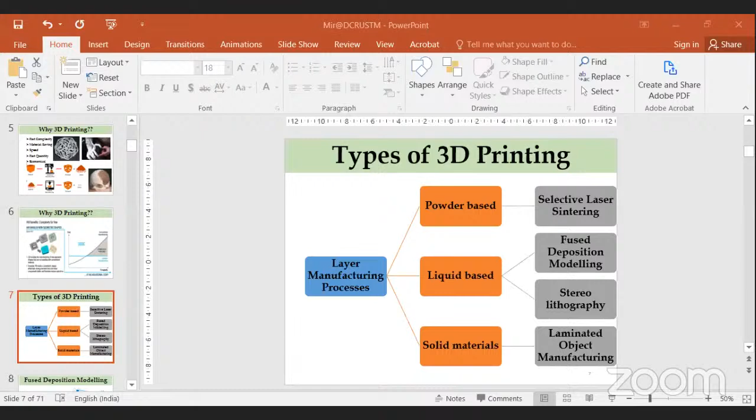Excuse me sir, sorry to interrupt. Sir, please share your screen, your slide is not visible. I thought initially you were giving a brief introduction, that's why I didn't say anything. Oh, you should have told me earlier. No issues, no issues, I'll just go through the slide. Now it is visible. Yes, visible sir. I'm sorry sir, this was the first slide, so I will just go through these slides quickly.

So I talked about this disclaimer from my side. This is the outline I was talking about.

Then I talked about what about basics. I was talking about why 3D printing.

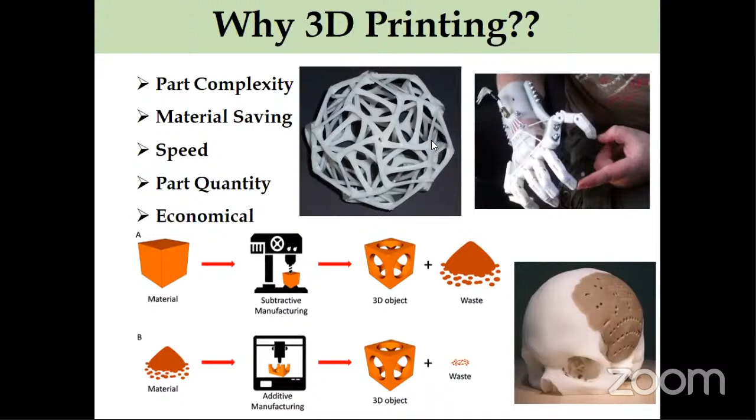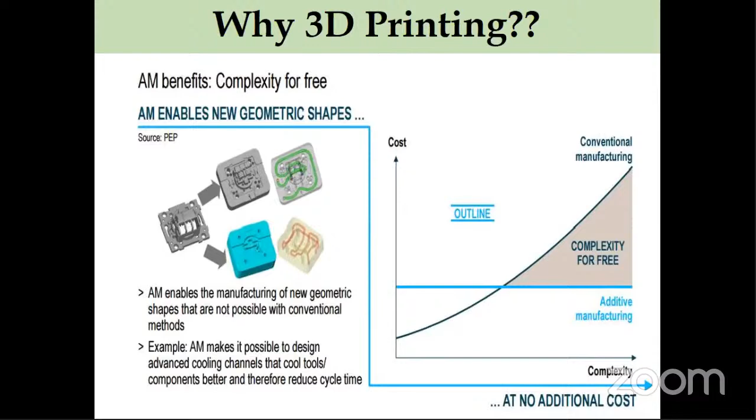Then I was talking about part complexity, that complexity is free. This graph shows how additive manufacturing enables us to manufacture complex products, and that too at a very low cost and with no additional cost.

So I was discussing about the types of this additive manufacturing processes, wherein we were discussing that there are mainly three types of base materials. One is powder, second is liquid, and third is solid.

In case of powder bed, we use a powder as the base material and the laser sinters it selectively. That is why we call it selective laser sintering.

Likewise, in liquid based, we have fused deposition modeling, which is not liquid based, but semi-liquid based, wherein the starting material is basically solid, but later on, because of the extrusion and heating of that polymeric material, it comes out in a semi-liquid state. Likewise, stereolithography and laminated object manufacturing, but my discussion would be more on fused deposition modeling.

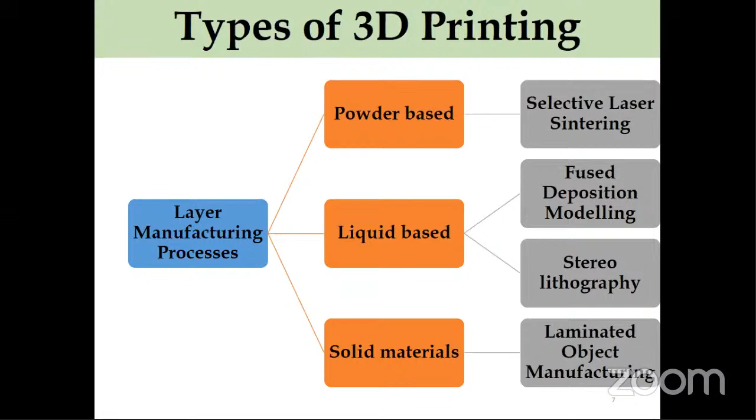This extruder is free to move in all directions, X, Y, and Z. And depending upon the information stored in the STL format of each layer, the extruder moves in different directions.

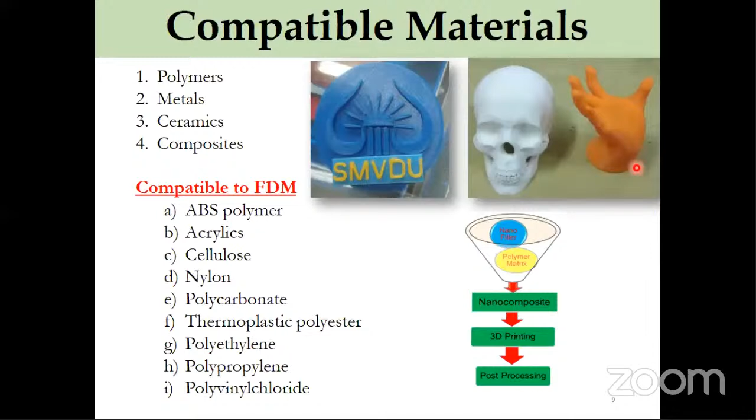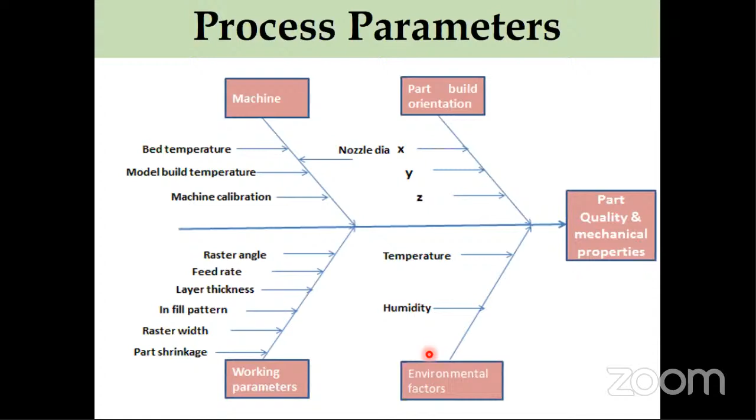Working parameters like raster angle, feed rate, infill pattern, and raster width will be discussed in the next slide. Environmental factors also matter - we have seen that when the fan or AC in the lab was on versus off, there is warpage which happens.

This is the effect of layer thickness. If you increase the layer thickness, the printed part will be rough. But if you want it smoother and want to capture the geometry very perfectly, you have to decrease the layer thickness.

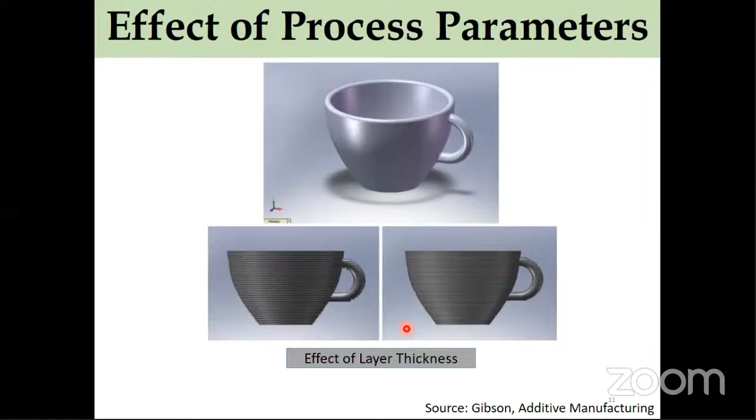So a small variation in layer thickness will actually vary the part quality. We were talking earlier about different infill patterns - how your material will be deposited.

This actually helps in weight saving also - honeycomb structure, triangular, rectilinear patterns. We have tried some of these in our work. And infill density, for example 100% infill density, or 70% infill density.

Part orientation - how you build the part - and layer thickness, what would be the thickness of each layer while you print it. Other parameters like raster angle, when it prints, what angle it makes, and the number of contours it keeps in each layer at the periphery. All these parameters actually determine the mechanical strength of these 3D printed parts.

There are some challenges also. For example, in a typical FDM process, there is a cold layer on which a hot layer is deposited, and because of this differential temperature gradient, stress gets developed which leads to contraction and may cause warpage. That is why we have to choose an optimal bed temperature and optimal extruder temperature, so that the temperature gradient is not too much, and the bonding is perfect.

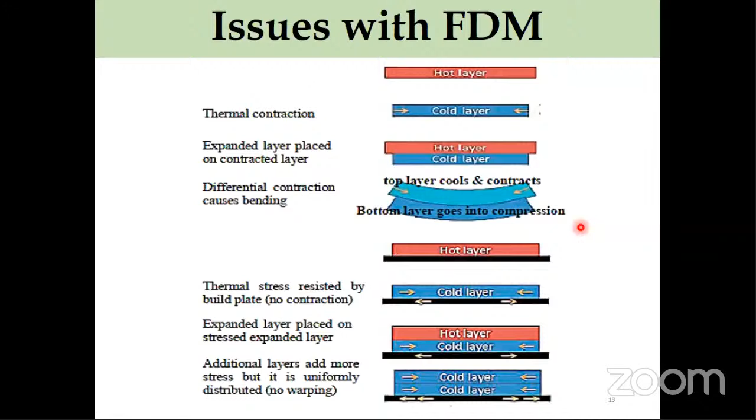The interbonding strength will actually determine the quality of your part, be it mechanical strength or any other property. If we take 3D printing as a whole, there are some challenges which need further research and improvement.

For example, we have limited choice of materials, particularly in case of metallic 3D printing, and the cost of materials is not that low. Dimensional accuracy, because of warpage and other issues, is not giving us accurate dimensional parts. Mechanical properties are also not that good, depending upon the process and parameters.

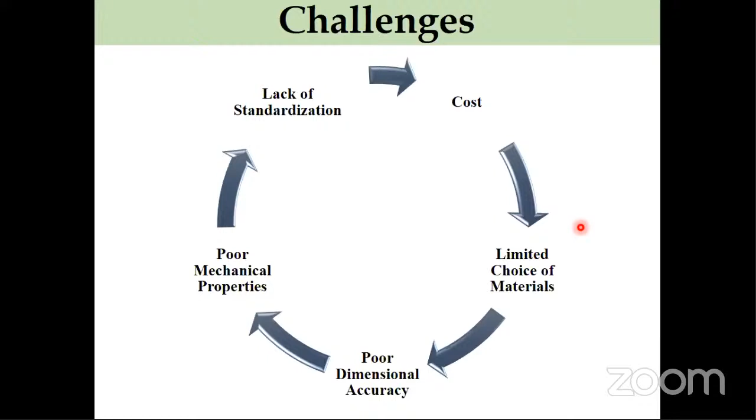There is also a lack of standardization because not much work has been done yet. You cannot say that for a given material, if you want a part good in tensile strength, what should be the printing parameters. There are lots of papers published, but there are still no standards available so that we can replicate results and get good outcomes.

If you talk about cost, the fixed cost in case of conventional or traditional manufacturing is high in all cases, whereas in 3D printing it is low - be it supply chain cost, tooling cost, or setup cost. As of today, you can purchase an FDM printer for as low as 17,000, so you can have a printer at your home or lab and start printing small samples or products.

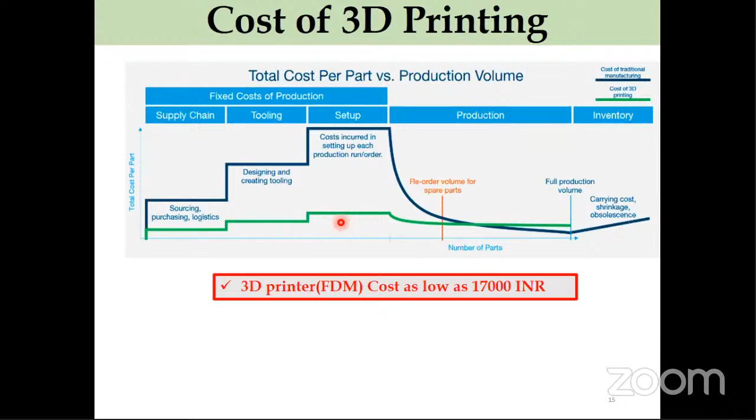We all know sustainability is the buzzword, and yes, 3D printing is sustainable because less waste is produced. We don't require any specialized tools or fixtures for additive manufacturing, and it has the ability to develop lightweight parts, which help in fuel saving and reducing the carbon footprint, leading to sustainability.

Largely, additive manufacturing or 3D printed processes are material efficient when compared with traditional machining and casting. It has the ability to produce optimized geometries, which develop products with good strength-to-weight ratio, resulting in lighter and more efficient engineering products. It also has the ability to create on-demand spare parts, reducing or eliminating inventory.

So we no longer require an inventory. If we have the geometry or the CAD file of a spare part, we can develop it, provided the intellectual property is not protected.

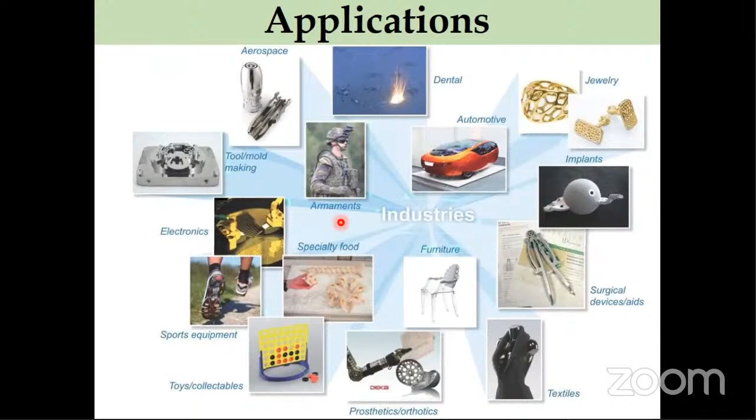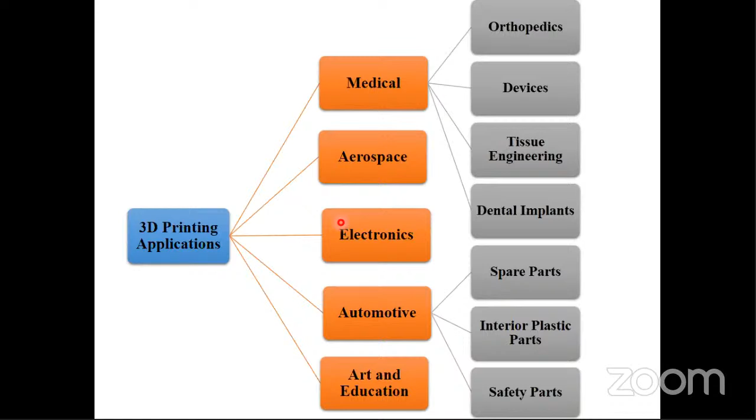So these are the different application areas where 3D printing finds applications: medical, aerospace, electronics. Then we have spare parts in case of automotive. So in automotive, a lot of applications are there, and medical, I would say, and that too post-COVID. If you see the market size of 3D printing, if you remember, we used to call it rapid prototyping. It is no longer known by that name, because now functional parts are being developed by 3D printing. And the market size of functional part manufacturing is growing, and it is anticipated by 2024 it would be around 33%.

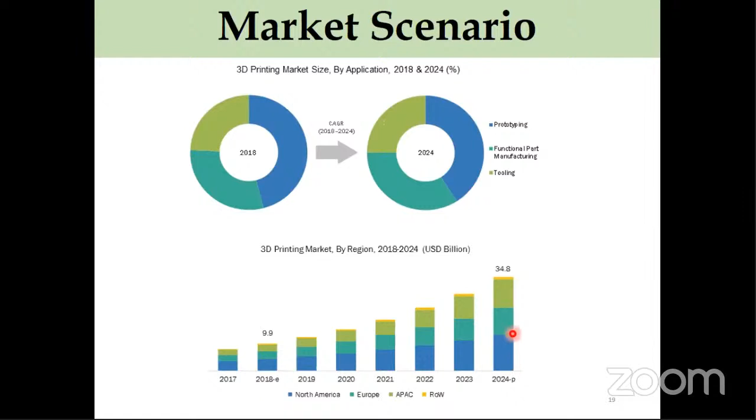And if you see country wise and the rest of the world, in USA and other countries, how the market share is increasing. So that is the future. And the future is basically your old toothbrush. You find in the night that your toothbrush is getting old, you will give a command to the printer, and tomorrow morning you will have a customized toothbrush, and you will use it in the morning. So that is the future.

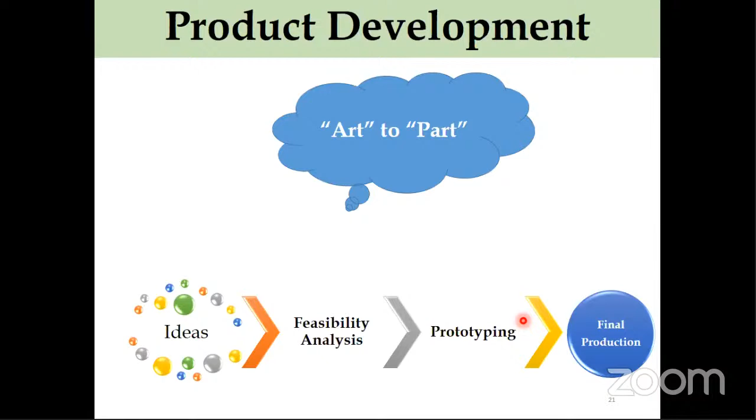And I have put some slides related to product design, because the title of the FDP was 3D printing and product design. So if we talk about product design, or the design process, it is a process from art to part. We have ideas, and then from those ideas, we do some feasibility analysis. Then after that, we have prototyping and the final production. How 3D printing will play a part in this, I will try to discuss.

So we all know that the design environment has changed. The old design process was very slow, and the product development cycles were not that short. Today, the life cycle of a product is very short, and design time for each product is getting shortened. So 3D printing will actually play a part, because apart from prototyping, it develops parts directly. It does not require any tooling, any separate fixtures or dies like we have in case of casting. So we don't require any molds or any other secondary manufacturing infrastructure. All we require is the CAD files.

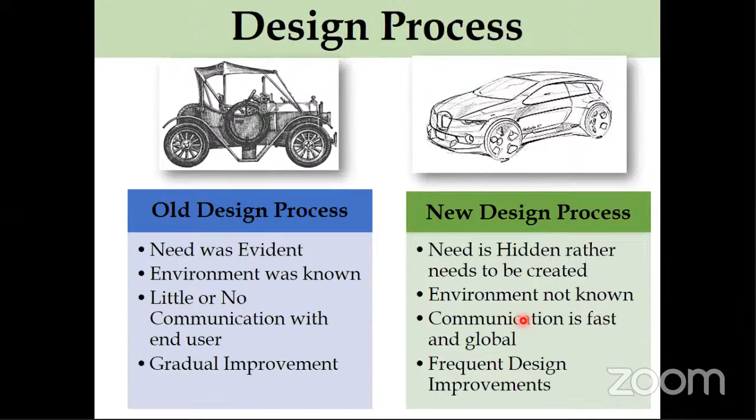So if we compare the old design process and the new design process, things have completely changed. We need frequent design improvements, and the communication is very fast with the end users. We need to change, and we need to keep the customers satisfied. Otherwise, we are out of the market. So that is where 3D printing will come to the rescue of the industries, or the engineering fraternity.

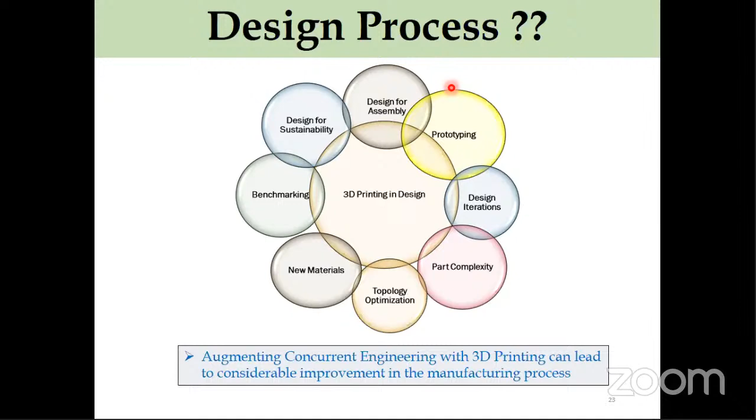If you see 3D printing in design, from prototyping to design iterations, including part complexity in a product, topology optimization, introducing new materials, benchmarking, design for sustainability, design for assembly, these pillars or facets, some of them are related to life cycle engineering. Some of them are steps in a product development cycle. They all will help improve the manufacturing process. So we have to augment concurrent engineering with 3D printing, and that will improve the manufacturing environment.

One more important aspect of any design is that somewhere a natural system is conceived by some person, and then we try to mimic that. And we cannot fully, because we all believe that nature is perfect. We cannot reach that perfection, but we try as engineers or designers to somehow reach it. But these natural systems are complex. So mimicking those systems and developing them by conventional processes was difficult.

But 3D printing, because we know the complexity is for free, and a lot of research is going on, and we have also started some work in this direction, wherein we take lessons from a natural system and try to incorporate them in our design, and then see that the product performance is improved.

There are some works done by designing armor for defense application by mimicking fish scales, and the armor was developed by 3D printing. Plant tissue inspired furniture, wherein a typical lattice structure was developed, and then insect wing inspired lattice for shoe soles. And by virtue of 3D printing, we could develop 3D printing gun, which would actually,

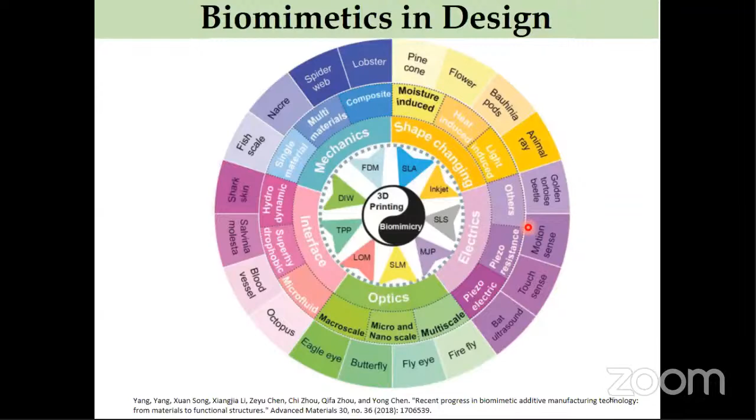So that is the beauty of this 3D printing, that things which were impossible to imbibe in your design, now it is possible. So looking at nature is now, I would say, easier, and developing products which are closer to nature would be easier. So what designers basically need is that any idea or any business is innovation driven. We want that the product development cycle should be short.

It needs capital, and when we talk about entrepreneurship, there is always huge risk, and we are dependent upon manpower. But in case you use this 3D printing, I think everything will be reduced, be it shortening of this product development time, decreasing your capital cost. Risk is also less, and the manpower requirement will also be lessened by using this.

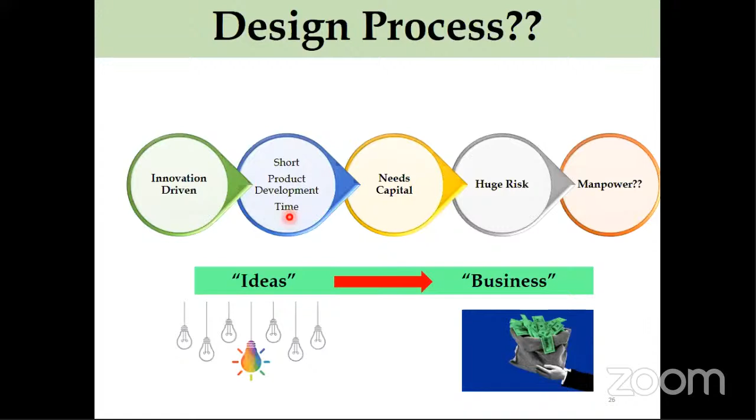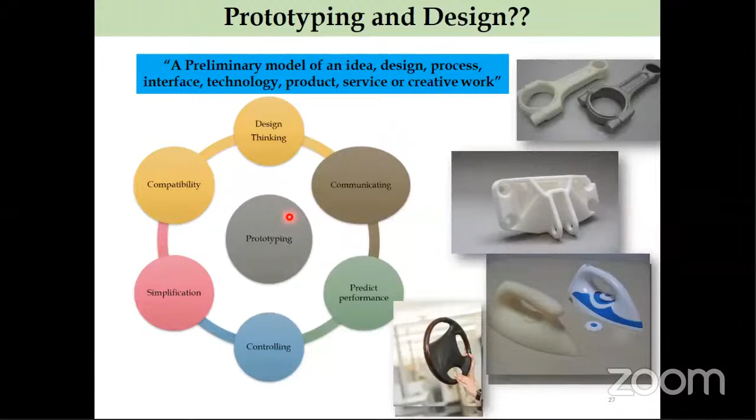So again, prototyping, I will skip this slide, how prototyping helps in improving the design process, because it helps in design thinking, communicating, predicting the performance, checking the compatibility, simplification of design, and controlling various parameters beforehand, before actually manufacturing the product by any conventional process. 3D printing can help.

So these are the things which we as designers or industrialists want. We want less material to be included. We want less initial investment, less labor cost, easy. So these all things will be done by 3D printing.

Now, another aspect is benchmarking. Whenever we are into product development, we actually first study other designs. So designing is not like we will sit in a room and start thinking, and we may end up reinventing the wheel. That should not happen. Before we start any product development, we study previous art, we study competitors' products, we study the patents, literature. So that all has to be studied.

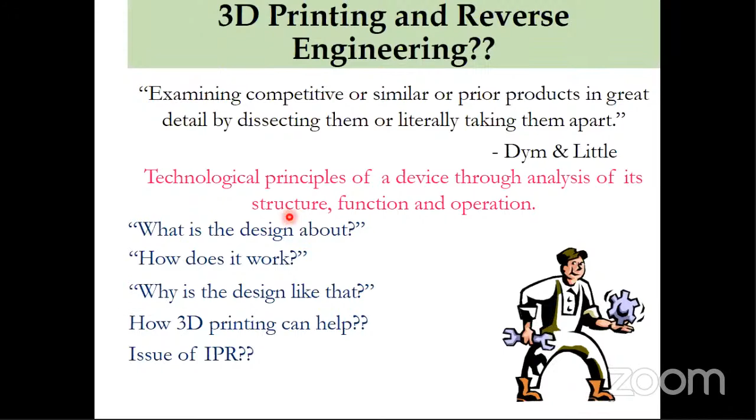But sometimes we don't have the designs. We have the product, but we want to analyze the products of a competitor or any existing product. For that, we need reverse engineering, and 3D printing can help in developing parts fast by benchmarking other products, or by doing reverse engineering of products, wherein, for example, the designs are not available, or they are protected by intellectual property rights, and we want to just study it. So there 3D printing will also play a part in the design process.

So since part of my talk will be related to tribology, for those who have not worked in the area of tribology, it was actually coined by Peter Jost in the year 1966 in the famous Jost report, in which he concluded that if we use good tribological practices, the GDP of any nation can be improved by 1%.

So it is the science concerning friction, wear, and lubrication, and we know that 1/3 of the world's energy resources in present use appear as friction in one form or the other. So that is where we as tribologists, or mechanical engineers, come into the picture, that we want to reduce the friction. For example, in an automobile car, if the friction is reduced, there will be saving of fuel, and that will improve the lives of the people, number one, economically. Secondly, that will help from an environmental point of view also.

So what is tribology? Two surfaces coming into contact, and they are sliding on each other. There's a friction force which gets developed, and because of this, there is a lot of complexity which comes into play. There is chemistry, there is third body abrasion, various types of wear, how this wear happens, what is the speed at which they are sliding, what is the load, what is the temperature, what is the direction of sliding.

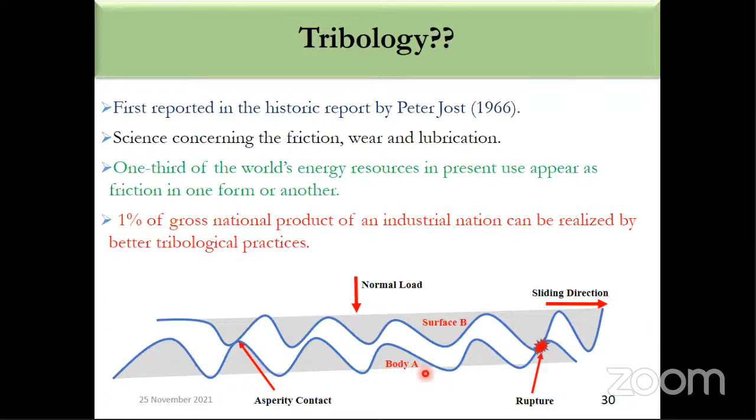These all things actually determine what is the coefficient of friction and how things wear out. So that would be discussed in one or two projects which we have done. So when we talk about wear and friction, it is not always that we want to minimize friction and minimize wear. No, it is sometimes the other way around also, depending upon the application.

Suppose we are working for developing brakes, we are developing clutches, we are working on tires, on developing shoes. So we want that the material should wear out very less. That means it should have good wear resistance, or the wear should be minimum and friction should be maximum. So that is this application.

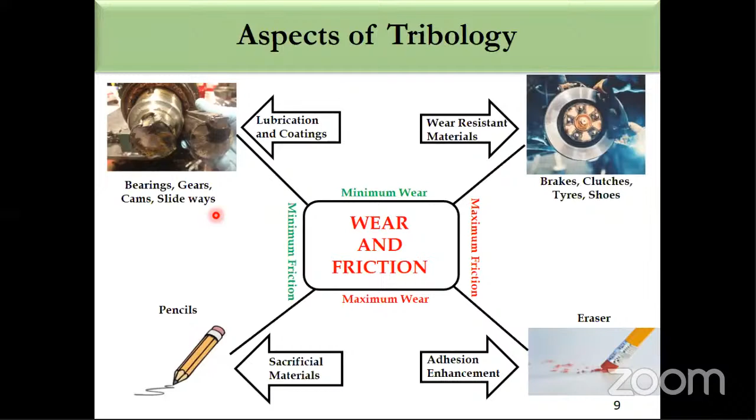And sometimes we want that it should have maximum wear, maximum friction, say, for example, in case of an eraser. And sometimes we want minimum friction, maximum wear, say, for example, in case of a pencil. And sometimes we want both to be minimum, say, for example, in case of bearings, gears, cams, sliding ways. So that means the area of tribology is very vast, and we have very different challenges depending upon the application.

Now, I'll start with the work, what we have done previously. This was the brief background because I anticipate that the participants would be from different fields of research and different backgrounds. So that's why I thought that I will give a brief introduction so that you can connect with what I want to share.

So the first project was basically on mechanical behavior of 3D printed parts, wherein we developed samples of polylactic acid according to ASTM standards, and we varied the various 3D printing parameters such as primary layer thickness, bed temperature, infill pattern, and then we did tensile testing as well as flexural testing for these PLA samples.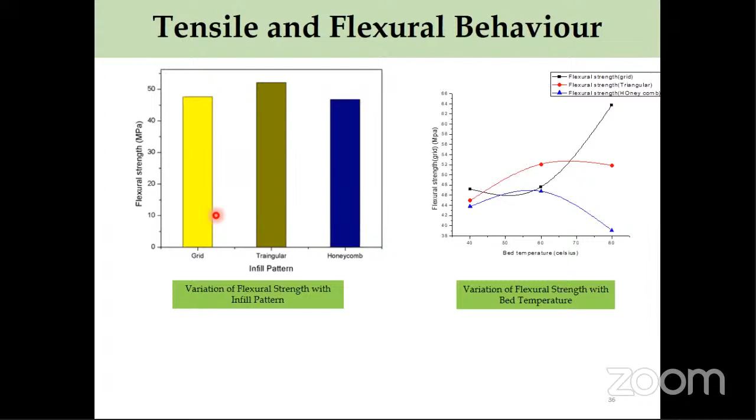We did some SEM analysis in which we could observe that there are differences in the modes of fracture which are happening, and primarily the interbonding strength is the key parameter which actually determines the strength of the part. And sometimes it was a brittle fracture, sometimes it was a ductile fracture, some amount of necking was observed prior to the actual breaking of the samples.

So the key point which we found from this SEM analysis was that if the interbonding strength is improved somehow, the parts will actually improve the strength, because the cracks and other things actually get initiated at the interbonding layer. So if that bonding is strong, the crack initiation may be delayed.

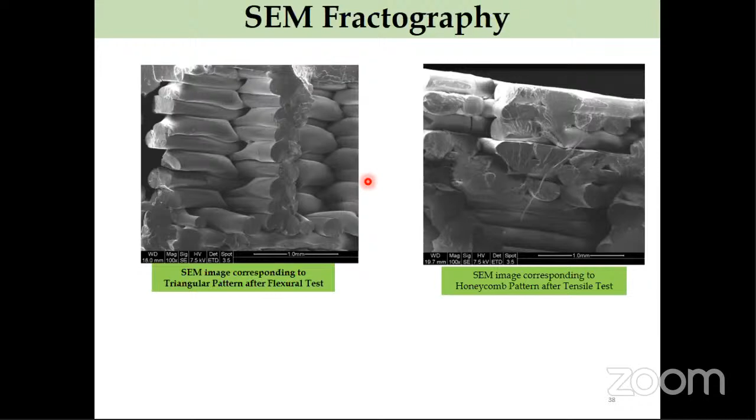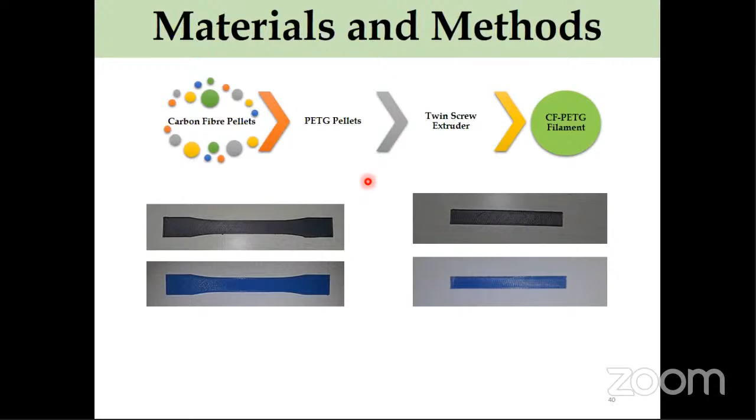Another small work which we did was related to 3D printed composites. It was related to PETG, wherein we introduced carbon fiber pellets inside these PETG samples, and then we tested it for tensile strength as well as flexural strength, and then in a separate work we have actually done the tribological testing of these samples also.

And these results are for carbon fiber reinforced PETG, and we could see that the addition of carbon fiber as reinforcement, 20% by weight to the PETG, improved the tensile strength. So that was one result. And another important observation which we found, that at the layer thickness 0.1 and at all infill percentages, this behavior was observed, but not at higher layer thicknesses because of poor matrix and filler addition. And we could see a very good improvement in the tensile strength, which is around 114% for

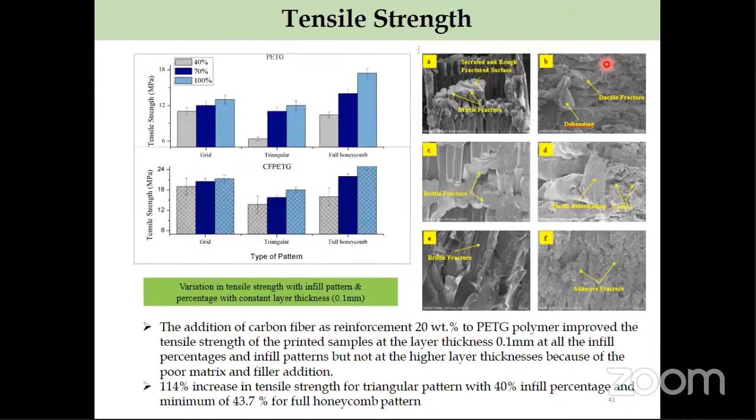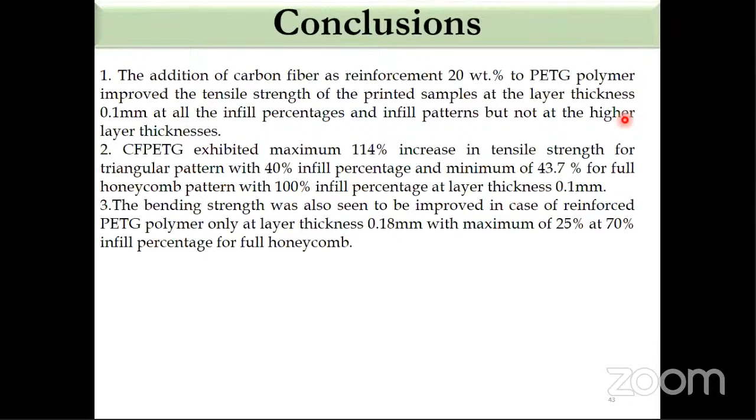And we could see that the bending strength was improved in case of reinforced PETG only at a layer thickness of 0.18 mm, with a maximum of 25% at 70% infill percentage for full honeycomb. So that was about flexural strength, which improved. And these were some of the major conclusions of this work, that the carbon fiber actually improved the tensile strength at the layer thickness of 0.1, and also it improved the bending strength by reinforcing it with carbon.

Another work was related to tribology of FDM printed parts, wherein we did some surface texturing. Surface texturing has a very great potential in improving the tribological performance, because texturing introduces local depressions, and they trap the wear debris. Because if the wear debris comes between two sliding surfaces, third body abrasion happens and it causes abrasive wear, and that causes ploughing, which is very detrimental for the material. And they also act as reservoirs for lubricants.

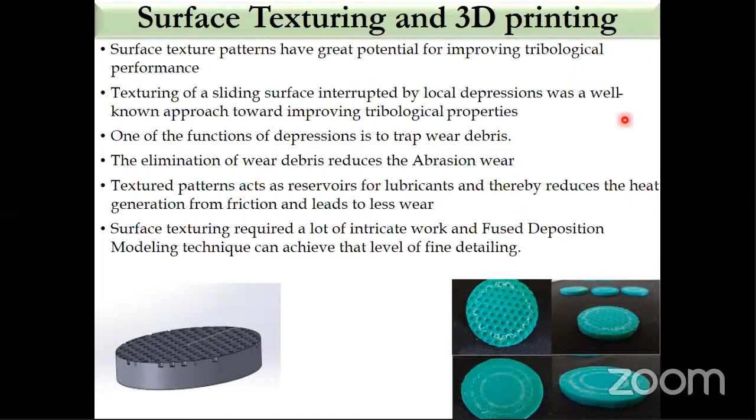So if we are doing a wet lubricated condition, then in these textures the lubricant gets stored, and that actually reduces the heat generation from friction and leads to less wear. Surface texturing requires a lot of intricate work, and it is a little bit difficult by conventional processes, but the fused deposition modeling technique can do it very finely, and we did it in our lab.

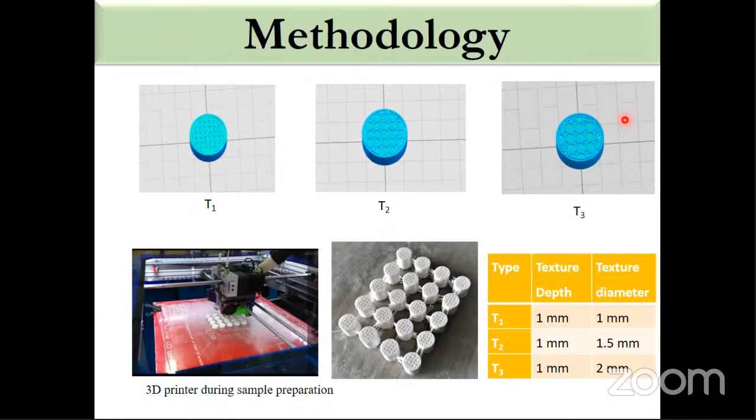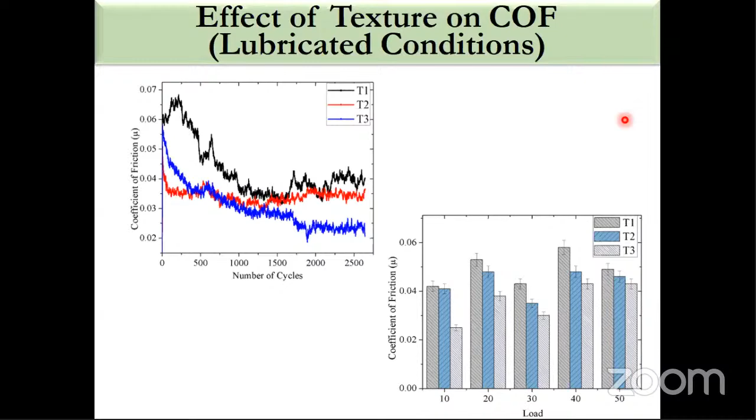And likewise, for lubricated condition, we could see that texture T3 is performing better, and we could see from the frictional characteristic also that with the increase in the number of cycles, with time, the curves are getting smoother, and not much deviation or erratic behavior was observed, which is actually good, because these textures or depressions basically store 2 things. One is the lubricant, another is the worn out material, which helps in improving the tribological performance and delays the wear process, which is a good thing.

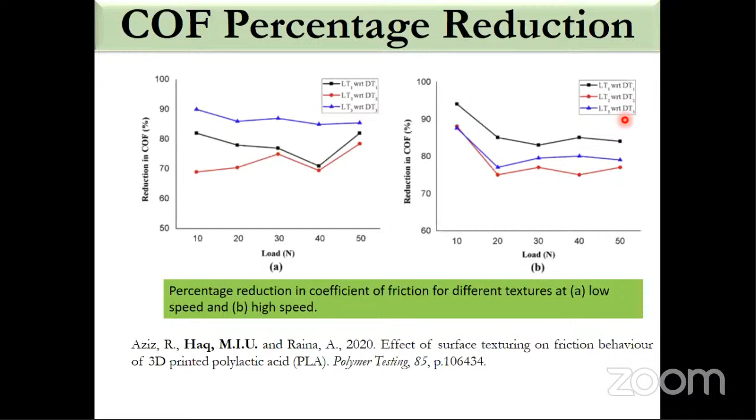Another observation was the percentage reduction in coefficient of friction for different textures. At low speeds and at high speeds, we could see a good amount of percentage reduction, around 70%, which is a good thing. So this work is already published. You can read it. We did some SEM analysis of these worn textures at a particular load, and we could see that very peculiar, smoother worn surface features were observed.

In comparison to non-textured samples, we could actually improve the wear behavior, and very different and very peculiar worn surface features were observed because of the entrapment of the wear debris, and because of the storage of the lubricant in these small textured holes, or you can say these depressions.

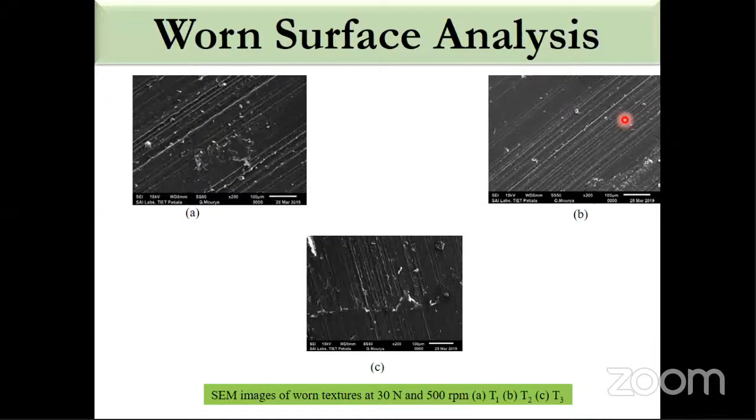So these were some of the conclusions from this study. The coefficient of friction is minimum for T2 under dry conditions, while for lubricated conditions, T3 was the better one. But it was observed that this is because of the synergetic effect of two factors: the real area of contact and the lubricant retention capability of the textures. So that was the key observation.

And as I told you, plowing of the material in bulk was absent, which is because of effective layer formation and entrapment of the wear debris in the depressions of these textures. So you could see that reduction of coefficient of friction was observed for texture T3 at lower speeds, while T1 at higher speeds gave the maximum reduction in coefficient of friction. So these were some of the conclusions which we could draw from this study.

Another work which we did was stage 2 of the PETG work, which we first tested for mechanical strength. Then we did tribological tests on these PETG and carbon fiber reinforced PETG samples. We tested the samples at five different loads, 10, 20, and so on up to 50, at both high speed and low speed. The wear track diameter and the sliding distance were kept around 100 and 1500. And to check the morphology of these worn surfaces, we did SEM analysis.

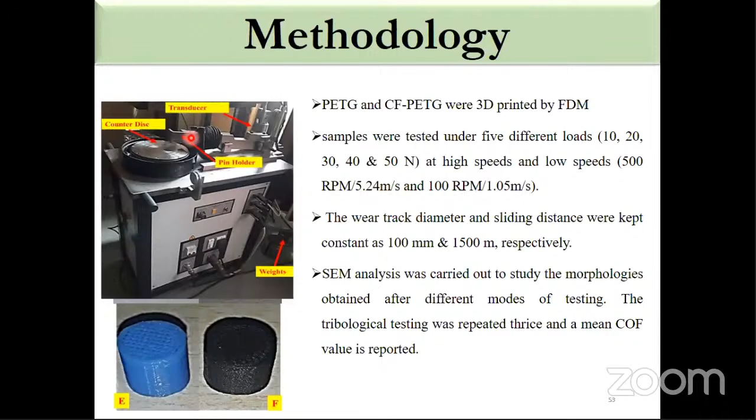This counterface rotates, and rotation of this counterface disc helps in the sliding action of these two materials. So this is a unidirectional pin on disc tribometer. It is not a reciprocating one. It is a unidirectional sliding wear tester, which we used in this study.

As some of you must know, carbon fiber, like graphite, is a very good solid lubricant. Carbon, because of its layered structure, with consecutive layers bonded by weak van der Waals forces, acts as a solid lubricant. And that was visible here: when we tested these samples at different loads, in comparison to non-reinforced PETG, the coefficient of friction is lowered. And at a higher RPM also, a similar behavior was observed, that the carbon fiber has a good role in reducing the coefficient of friction.

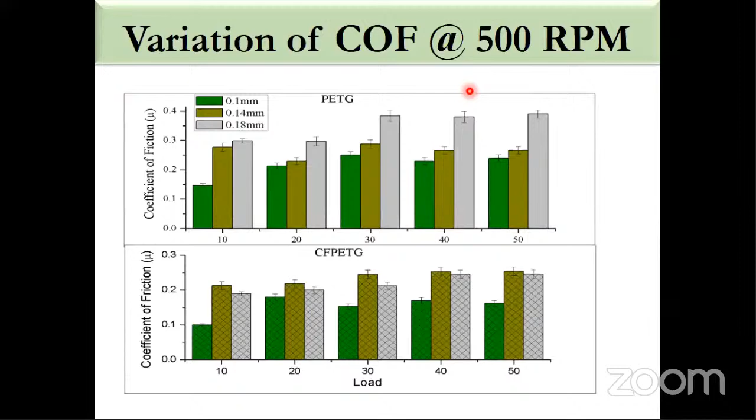From the frictional characteristics, we could observe that for PETG, if you run it for a large number of cycles, with the increase in the sliding distance or number of cycles, the coefficient of friction is increasing, which is not a good trend. But when we reinforce it by carbon fiber, when we increase the number of cycles up to, say, 2000 or 2500, the coefficient of friction is going down, which is due to the layer formation capability and the solid lubrication capacity of carbon, which is helping in exhibiting this behavior.

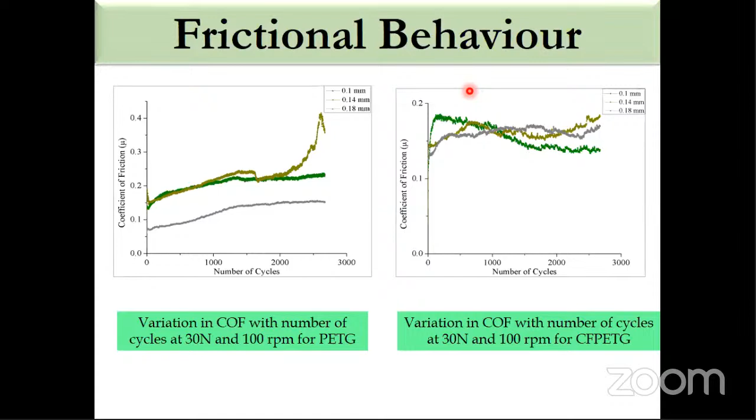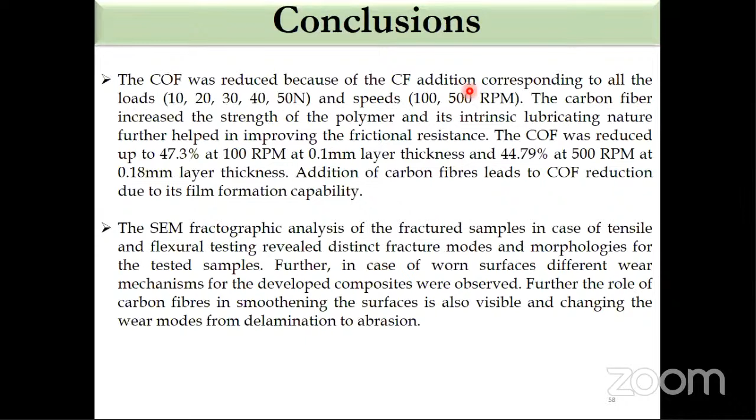So we could conclude from this study that the coefficient of friction is reduced because of carbon fiber addition at all loads and speeds. This is happening because of the intrinsic lubricating nature of carbon and the film formation capability of carbon. And we could see from the SEM analysis that different fracture modes and wear modes are observed, and smoothing of the worn surfaces happens by addition of carbon.

We have done some work related to development of exoskeleton for

We were here, that we have done some work on a project on this exoskeleton for fracture, development of this exoskeleton. We all have encountered, or someone in our family has encountered fractures, particularly in our childhood, wherein there are two common fractures which actually happen: one is a Colles fracture, another is a Monteggia fracture. The Monteggia fracture affects both bones of the forearm, usually a fracture in the ulna, and the top head of the radius is dislocated. This is very serious and sometimes requires urgent care.

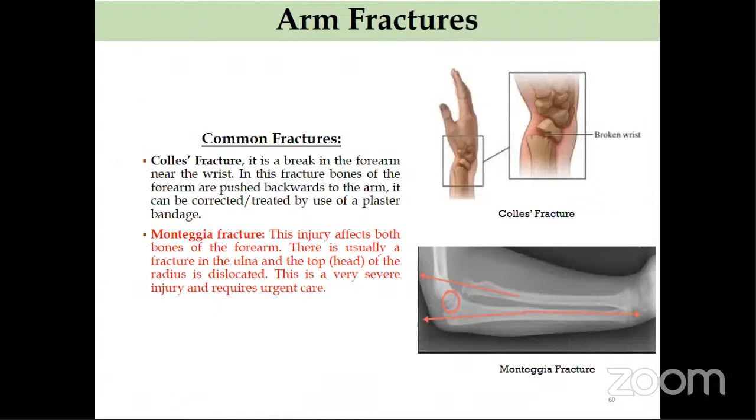We all know that we use plaster of Paris or a very heavy exoskeleton to help it recover, which was non-water resistant, extremely heavy and cumbersome to carry, very poor in air ventilation, resulting in allergic skin reactions and dullness of skin. It actually causes irritation due to accumulation of sweat. Imagine you have to go for a meeting tomorrow and you have this with you, God forbid, and you feel very irritated, or in very humid conditions you are working, and then your skin may get irritated and develop some dermatological issue.

So what were the objectives of this small project? To design an exoskeleton bracket and fabricate it using 3D printing technique, and then we did some feedback and testing from experts, patients, and doctors.

You could see this exoskeleton bracket, which we developed for avoiding compartment syndrome. What we could observe is mobility of the proximal and distal joints to avoid muscle atrophy due to its lightweight, and the range of motion. In the conventional one, it actually seizes the movement of your muscles, which is not good.

So here we could give proper ventilation for air so that it does not sweat, and it was light in weight. We developed 2 to 3 designs, and then a questionnaire based upon level of comfort, ease of joint movement, air circulation, muscle support, aesthetics, locking mechanisms, susceptibility to shocks, with 50 to 60 reviewers. We have a hospital nearby of our university.

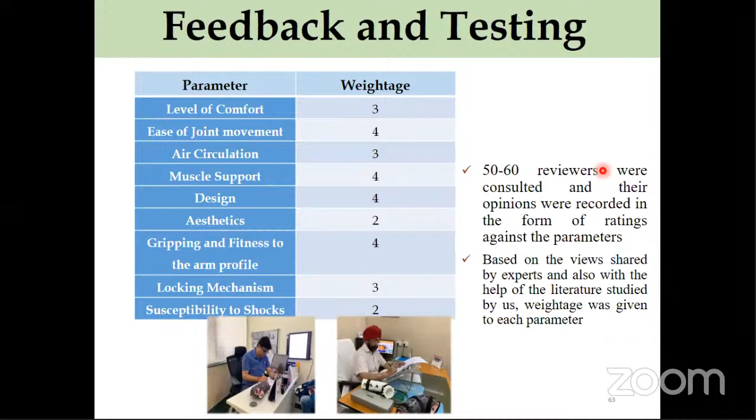We did some interactions with patients and doctors there, and we could see that weightage to each parameter was given, and then we ranked our designs. This was one work used for a small product development, and it is work in progress. We are actually improving the design part of this.

Another work, which I have not shown here, was related to development of impellers by 3D printing, and we did some testing in case of submersible pumps, particularly in water coolers which we use at home. I have a case study.

Suppose we all have experience of air travel, and we use that steel buckle while the air hostess or staff tells us to buckle our seat belts. In the Airbus 380 project, they developed an optimized design. A conventional seat buckle weighs 155 grams, and if you design it with titanium with an optimized design, it boils down to 70 grams, which is a reduction of 55%. So weight should be reduced.

That means for an Airbus 380 with economy seating of 853 seats, for one flight this would mean a reduction of 72.5 kg. Over the airplane's lifetime, 3.3 million liters of fuel would be saved, or in other words, 2 million euros could be saved, assuming a saving of 45,000 liters per kg over an airplane lifetime. So you can see from this small example how a small change in design will help in saving millions of rupees and improving the design for environment feature of your product. That is where 3D printing will actually help.

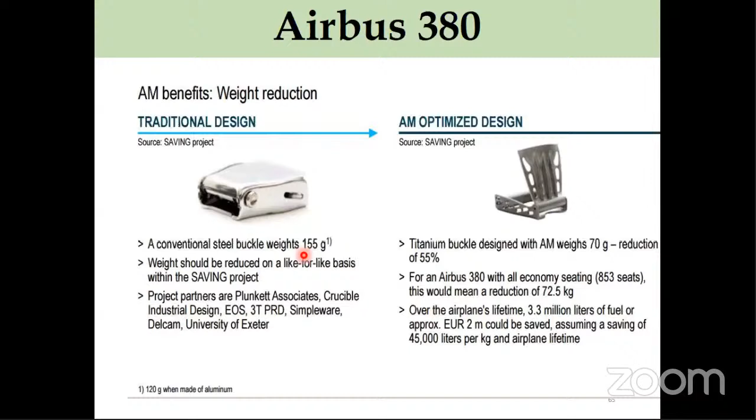We are now coming out of COVID, but if you see post-COVID or during COVID, 3D printing had a role to play, from development of masks to face shields to ventilator parts. We did an interactive project, I had a small role in that, wherein we developed valves like this. It was an open source project, and a single ventilator in an emergency situation could be used for 2 patients.

Due to lockdown and other things, transportation of these parts was difficult. But if you have a 3D printer, you can develop these small things for emergency situations at your place, with minimum human intervention.

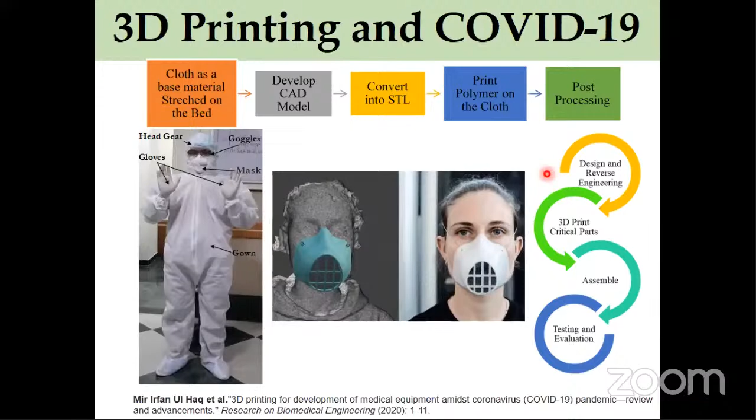So the takeaway points from this talk would be: 3D printing is a disruptive and affordable technology which entrepreneurs and designers can use in prototyping, development of small parts, and reverse engineering. There is a huge opportunity for the next generation to bring ideas, products, and solutions to life. A lot of opportunities for researchers, particularly from developing nations. As I told you, we don't have the state-of-the-art laboratory infrastructure, but with 3D printing we can innovate and exploit the potential, particularly the polymeric one, and do some good work in this area.

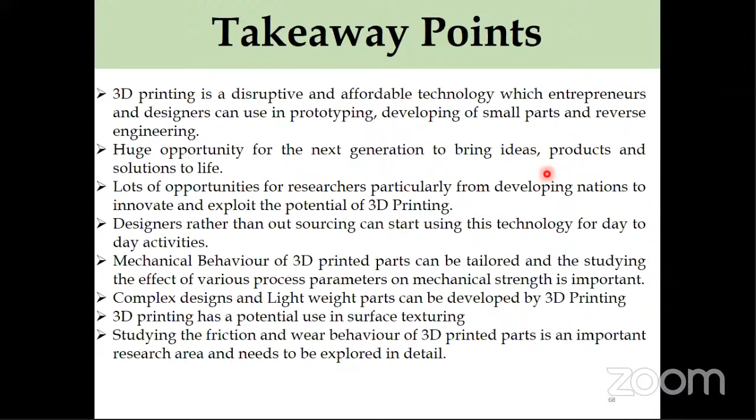Designers, rather than outsourcing, can start using this technology for day-to-day activities. Mechanical behavior of 3D printed parts can be tailored, and studying the effect of various 3D printing process parameters on mechanical strength is important. Complex designs and lightweight parts can be developed by 3D printing. 3D printing has a potential use in surface texturing, and studying the friction and wear behavior of 3D printed parts is an important research area that needs to be explored in detail.

This work was a joint work by our group, particularly the students, and I would like to mention them. Atharva Mega is the supplier of our 3D printing lab, and Sai Labs Patiala, SMVDU Narayana Hospital, and Medical Aid Center, because some part of the work was done in collaboration with them.

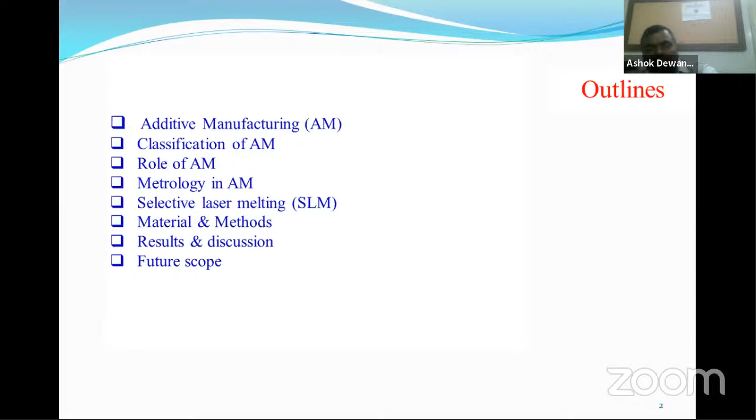Additive manufacturing, as the name indicates, is manufacturing which is additive in nature, while our conventional manufacturing is subtractive in nature. I'm not going into much detail of additive manufacturing because now even school kids are studying what 3D printing is. So AM makes objects from a digital model by depositing the constituent materials in a layer-by-layer manner using digitally controlled and operated material-laying tools.

A digital model of an object can vary from a pizza slice to an airplane wing, for example. If you watch YouTube, you can easily get videos of how BMW is able to make prototypes of 3D printed cars - cars which are even transparent, where you can see how your engine is working. This is the beauty of 3D printing.

Materials that are consolidated from the smallest particle, for example liquid droplets, wire, powder, etc. A tool for laying materials, generally an extruding tool or a laser source. A digital control system for the tool to lay the material layer by layer to build the shape of the object.

So basically there are two types of manufacturing: subtractive manufacturing and additive manufacturing. In subtractive manufacturing, your block, say in the shape of a cube, is processed to get the shape you want. You are removing material with the help of a machining process to get your final product, and the rest becomes waste product.

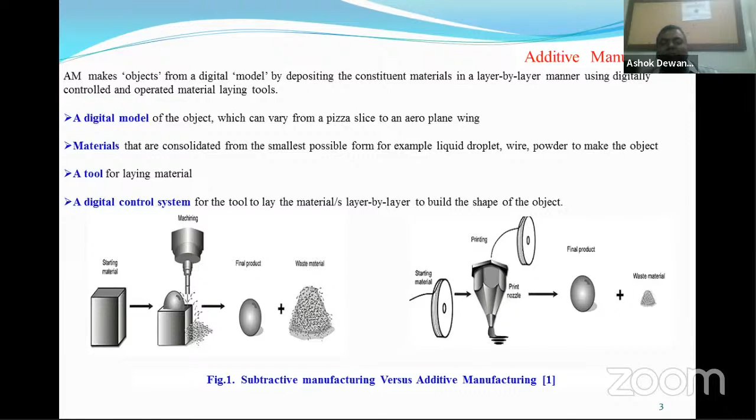So what are the different steps of additive manufacturing? In additive manufacturing, you are starting with your material selection. Your materials may be ferrous, non-ferrous, etc. It may be fiber or plastics, depending upon your printer, whether you are working with fused filament fabrication or FDM printers, PolyJet printers, or metal printers. So the main criteria in deciding your material selection are the mechanical properties, your shape, size, flowability, and what kind of application you're looking for.

Now, how about your process selection? Your process selection depends upon whether it is powder bed fusion, binder jet technology, or direct energy deposition, or in case of selective laser sintering. Like design selection, what you are looking for, your support for the structure, geometrical consideration, 3D CAD model. So basically, additive manufacturing is digital manufacturing. If you look at CNC machining, what are you doing? You are first deciding what is the geometry of the object. Clear? So here also you are expected to have a 3D CAD model of your object. Similarly, layout selection like chamber filling, orientation, form, fit, function, etc.

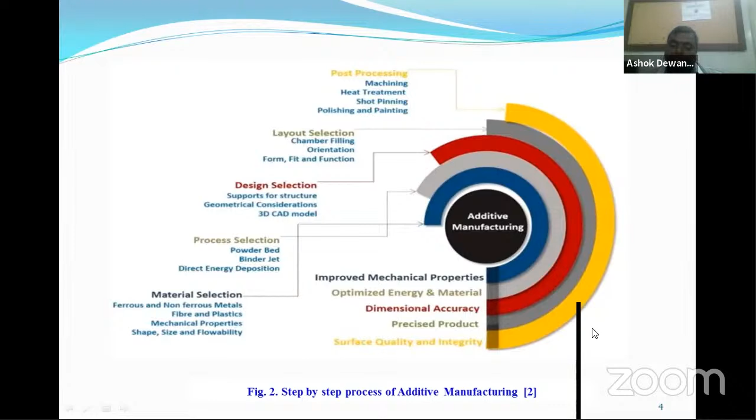So for just a very brief discussion to the participants, I am discussing the classification of additive manufacturing as per ASTM category. According to ASTM, your first category is vat photopolymerization. We know that stereolithography comes under this category. It is a liquid based process mainly useful for polymers, and you may infuse some ceramics into them. Benefits: you can fabricate large parts, excellent accuracy, excellent surface finish and details. Drawbacks: limited to photopolymers only, expensive precursors, slow building process. The main global players in this are 3D Systems and EnvisionTEC, Germany.

Similarly, powder bed fusion. Powder bed fusion is basically selective laser sintering or melting, SLS or SLM, or electron beam melting. In powder based processes, the starting material is powder, so you may have polymers, metals, ceramics, hybrids, etc. Benefits: large range of material options, and the powder bed acts as an integral support structure. Clear. So what are the drawbacks? Lack of structural integrity, high power required, size limitation. Basically, our metal printers come into this category, SLS or SLM. So 3D Systems, EOS, Blueprint, Renishaw, HP, etc. are now global players in this area.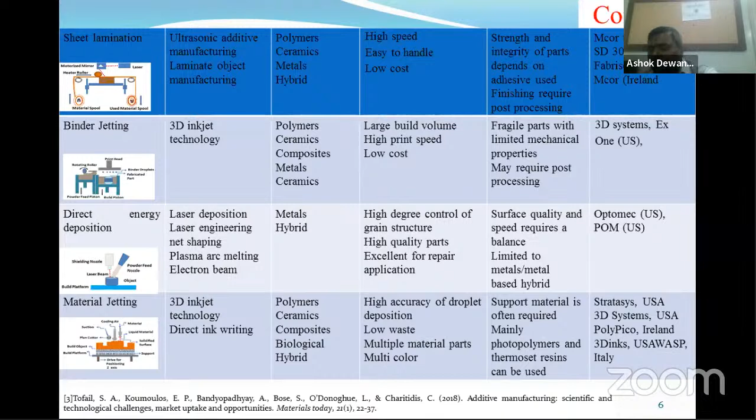Sometime back, around 2 years ago, there was news that a dog in Ontario, Canada got a brain tumor. The tumor was in his skull, so his skull was to be removed. If you remove the skull of a dog, certainly he was going to die. But the doctors were not willing to let the dog die. So with the help of 3D metal printing, they prepared a titanium alloy skull for him, the tumor was removed, and the area was covered with the 3D printed skull. So what I mean to say is, 3D printing has been useful in different areas.

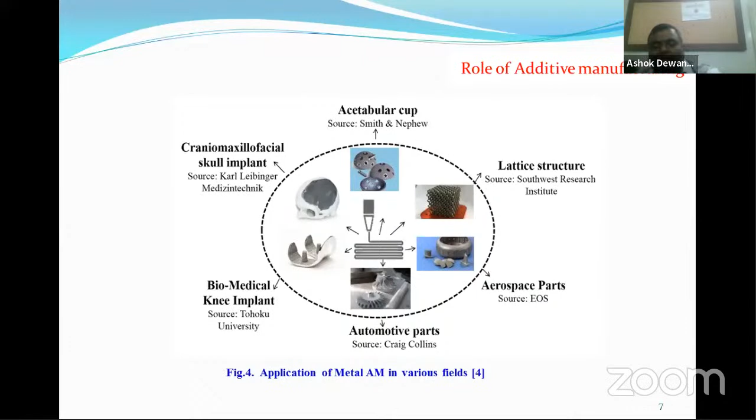So I have just given you some areas where metal additive manufacturing has been used. Additive manufacturing process is yet to be matured. And if you see, most of the work done on additive manufacturing is basically for prototyping. So some people call it only useful for rapid prototyping. But of course, a lot of people are working in different areas. So these areas were just to show where metal additive manufacturing is useful.

So metrology in AM. This is a very critical area. So what is metrology? Can anyone explain? Can anyone explain what is metrology? Any participant who would like to tell? What is metrology? Can anyone explain?

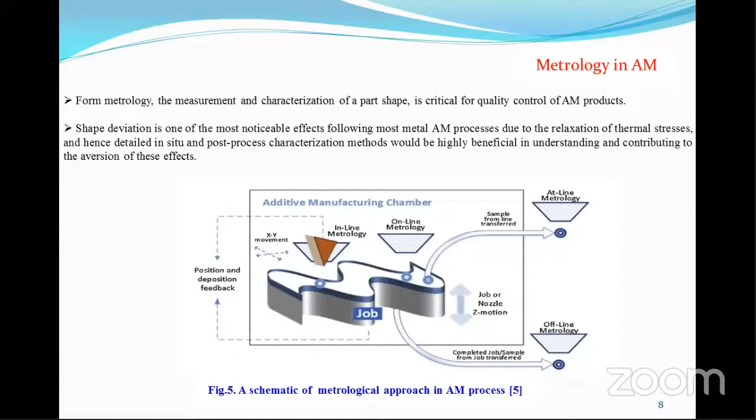Metallurgy is scientific study of materials. No, we are talking metrology. Metrology is science of measurement. Yes. Definitely, metrology. Yes, sir. So in metrology, what we are doing, we are taking repeated measurements. So the question is, why are repeated measurements required?

Why? For example, you are doing some experiment for the first time. You got a certain value. Can you rely that whatever value you are getting is correct? Of course, it may be correct, but it may be incorrect also. So you are going to take repeated measurements to evaluate whether there is deviation or not. As a layman, generally you will see whenever we are doing a certain experiment, we are taking observations only once. So that is not a good practice.

So what is the intention of studying metrology in any kind of process? It means you are basically repeating the experiment or repeating the measurement. Clear? So if you look at metrology in any kind of process, our main intention is to ensure the quality control of the process. For example, if I'm discussing additive manufacturing, I am discussing the quality control of additive manufacturing. So here in additive manufacturing, what is my product? The specimen which I am fabricating.

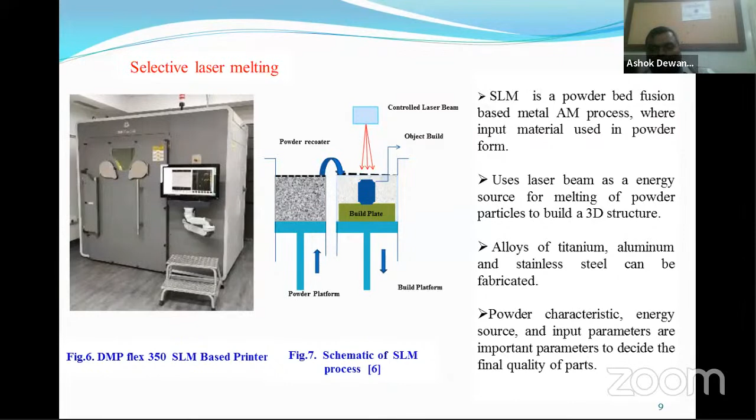We have utilized the selective laser melting process. This is a DMP Flex 350 SLM based printer. We used this printer, available in Mumbai. And this is a schematic of the SLM process. I'm not going to discuss it in detail. Basically there is a powder bed or powder recoater. Here is a build plate. Here we are getting a controlled laser beam and the object is built as per the design. So SLM is a powder bed fusion based metal AM process where the input material is used in powder form. In our present process, we have used SS316L, which is an austenitic steel with a low grade of carbon.

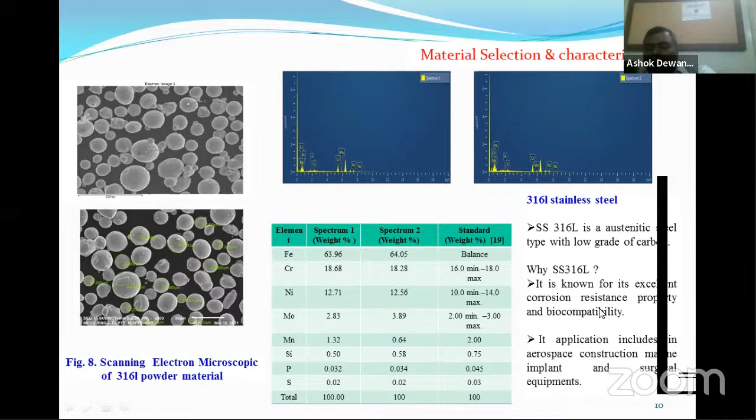So for example, if I am willing to study its tensile properties, then I will have to prepare a tensile specimen as per ASTM standard. If I'm looking for wear properties, I will prepare a wear specimen according to the standard ASTM G99. If I'm willing to study fatigue properties, then we will prepare the specimen as per the fatigue guideline. So dimensional characterization is the first and foremost important criteria to make an assessment of any part.

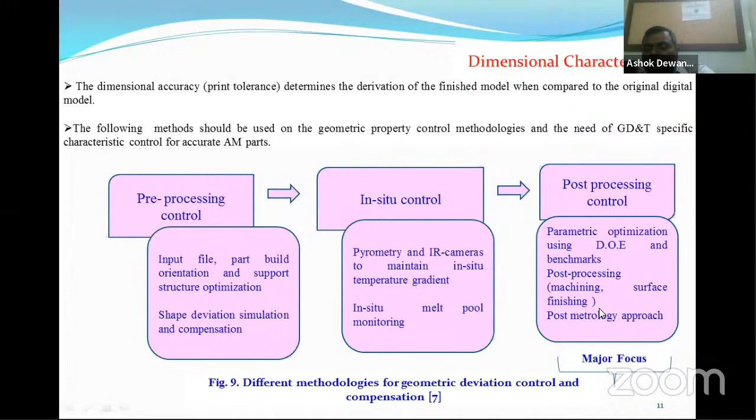So in this study, what we have done, we have fabricated some wear specimens according to ASTM G99 on a 3D metal printer. And we have varied some of the process variables like laser power, scan speed, hatch spacing. Laser power has been varied: 250 watt, 300 watt and 350 watt. Scan speed is 700 millimeter per second, 900 millimeter per second, 1100 millimeter per second. The hatch spacing is 80 micron, 90 micron and 100 micron. These are the parameters and their level values, which have been taken with the help of some past research.

So we have adopted an L9 orthogonal array according to the Taguchi design of experiment, and we designed these 9 experiments, and each experiment has resulted in 5 specimens. So there are 9 experiments, and each one is 5 times. So overall, 45 specimens were fabricated. As we discussed, we were not assuming that only one specimen is the correct one. So we fabricated 5 specimens for a single experiment, and total 9 experiments are there, meaning 45 specimens were prepared.

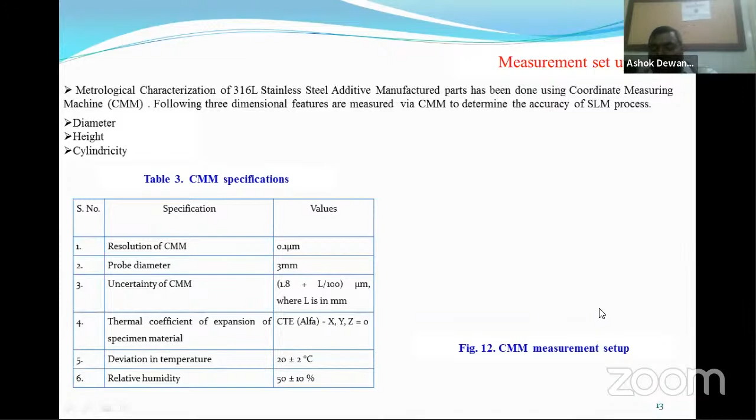So now our main intention is to measure the dimensions of diameter, height and cylindricity for this wear specimen, and to measure the uncertainty of measurement in all the cases. If uncertainty of measurement is very high, we can even take a decision that these specimens are not acceptable at all. If uncertainty of measurement is small and deviation to the nominal dimensions is small, then we can make a decision that specimens are acceptable.

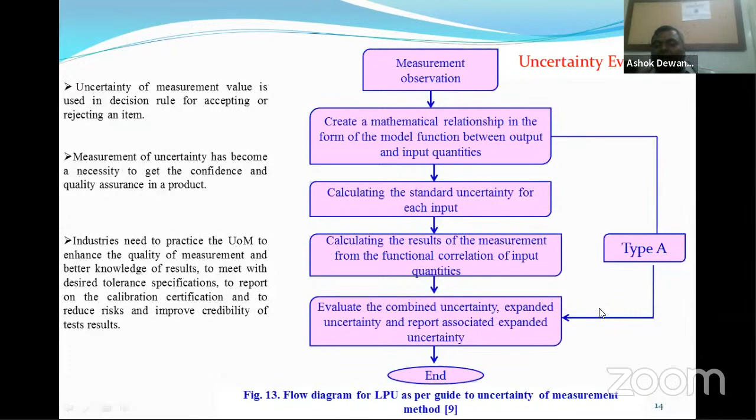So uncertainty of measurement has to be used as a tool for making a decision for acceptance and rejection. Industries need to practice uncertainty of measurement to enhance the quality of measurement as well as better knowledge about the results, to meet the desired tolerance specifications, to report on the calibration certification, and to reduce risk and improve credibility of the test results. So this is the flow diagram for the conventional method of measurement uncertainty evaluation.

So these are the 9 specimens. This is the average value of 5 specimens for specimen 1, 2, 3, 4, 5 like this. So uncertainty in diameter, uncertainty in cylindricity, and uncertainty in height. You will see different process variables, because every specimen, 1, 2, 3, is an independent experiment. You will see every one is different.

Clear? So for example, your specimen 1 has uncertainty in diameter. This diameter is 8.02, while its cylindricity is 0.04 mm, while its uncertainty in height is 33.55, plus minus something. So you see every specimen has its different uncertainty in diameter, different uncertainty in cylindricity, and different uncertainty in height. So accordingly, you can make a judgment.

While your height should have been 34 mm, in none of the cases you got 34 mm. Your diameter was supposed to be 8 mm, but your diameter is varying from 7.98 mm to 8.08 mm.

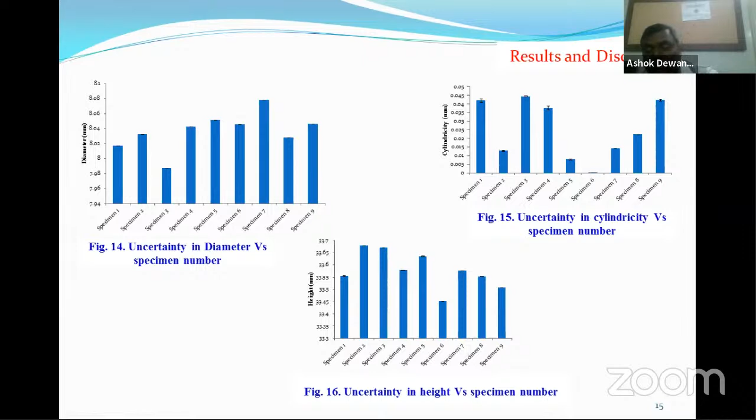So you will see for diameter, our overall expanded uncertainty has come to 2.2 microns, cylindricity 2.68 microns, and for height, 2.74. So it shows that laser power has had a more significant effect than scan speed and hatch spacing. High laser power may result in splashing during the powder melting process, which is dangerous. High laser power results in larger melt pools.

So we should work with low laser power, but if you take laser power very low, then it will take more time, and moreover, your material may not melt suitably. Similarly, hatch spacing is responsible for inaccuracy in the part, as it varies from 0.08 mm to 0.1 mm. Uncertainty of measurement is more because an increase in scan speed decreases the melt pool dimension.

At low scan speed, the laser material interaction time is high, so the powder particles get enough time. Although there is less deviation in samples compared to their nominal values, which shows SLM has good accuracy, still I believe a difference of 0.1 mm is not very small.